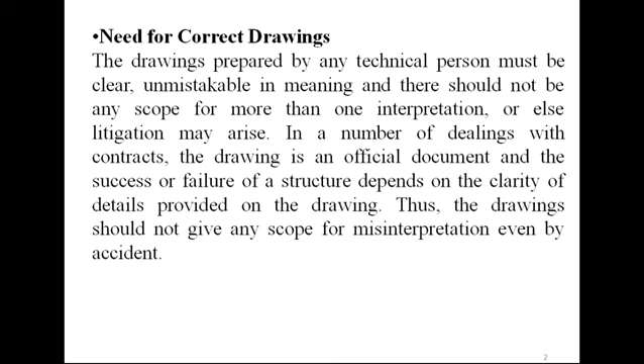If by mistake you add some wrong information into the drawing, the manufacturer can manufacture that component with whatever wrong information you have given. So that's why you should not give any scope for misinterpretation even by accident. It would not have been possible to produce machines and automobiles on a mass scale, where a number of assemblies and sub-assemblies are involved, without clear, correct and accurate drawings.

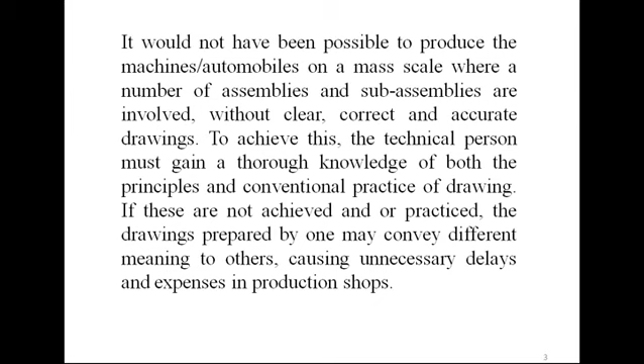To achieve this, the technical person must gain thorough knowledge of both the principles and conventional practice of drawing. If these are not achieved or practiced, the drawings prepared by one may convey different meanings to others, causing unnecessary delays and expenses in production shops. Hence, an engineer should possess good knowledge not only in preparing a correct drawing but also in reading the drawing correctly. So for reading purposes also we need to understand GD&T properly.

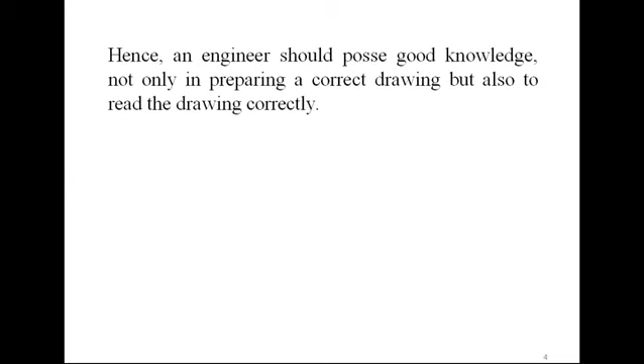We need to understand the standard practices, whether we are going to follow first angle projection or third angle projection, or whether we are using the inch system or metric system, because whatever you want to convey must get proper information to others. Now we are going to see the classification of drawing. Machine drawing pertains to machine parts or components. It is presented through a number of orthographic views, so that the size and shape of the component is fully understood. Part drawings and assembly drawings belong to this classification.

There are two types of machine drawing. Machine drawing is very important; when we provide a drawing to the manufacturer, it must be a proper drawing. One is a part drawing and the second one is an assembly drawing. A part drawing is a detailed drawing of that part. When you add every part, your assembly is formed. So when we are manufacturing the assembly, we are manufacturing every part as a unit, so a detailed description of every part is important. When every part is manufactured properly, we assemble them into one unit.

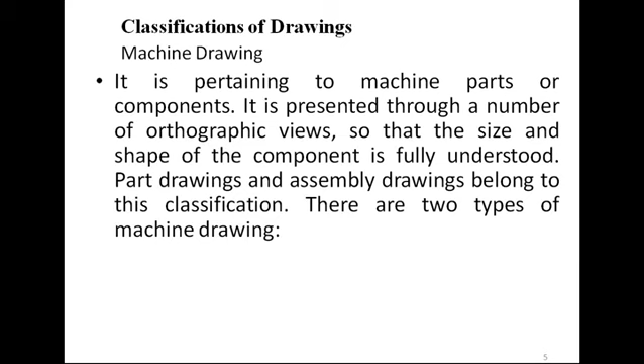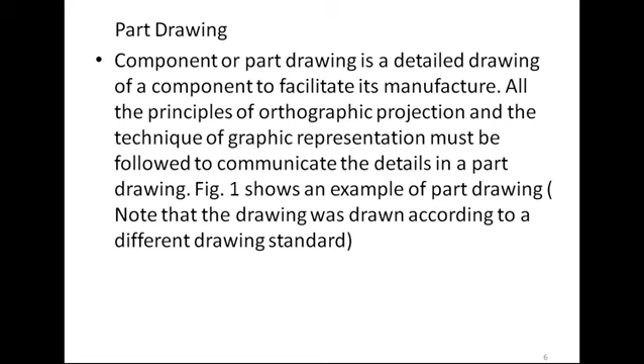So first is a part drawing. A component or part drawing is a detailed drawing of a component to facilitate its manufacture. All the principles of orthographic projection and the technique of graphic representation must be followed to communicate the details in a part drawing. Figure 1 shows an example of a part drawing. Note that the drawing was drawn according to a different drawing standard. The part drawing must include every detail, because it is a separate part of an assembly. We prepare every component with part detail because we want to manufacture every part, and then assemble those parts.

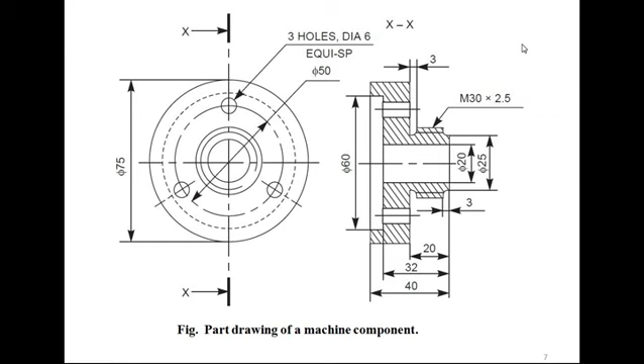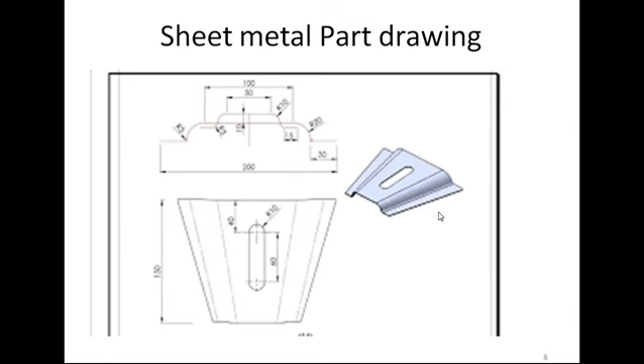Then one more is the sheet metal part drawing. Whatever sheet metal component we want to prepare, a detailed drawing is given here: the height is 150, the width is 200, and the corner radius we want to manufacture is 5, which is also mentioned. So whatever sheet metal parts we want to manufacture, we require to give proper dimensions.

A part drawing is a detailed information drawing of the individual parts, called a piece part drawing or part drawing or detailed drawing. Detailed drawings contain all of the necessary information to manufacture any specific part of a product. This is the same thing we discussed earlier.

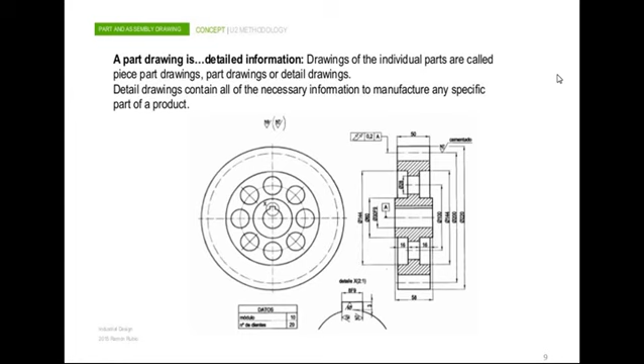Next is the assembly drawing. A drawing that shows the various parts of a machine in their correct working location is called an assembly drawing. Here the figure shows an example of an assembly drawing.

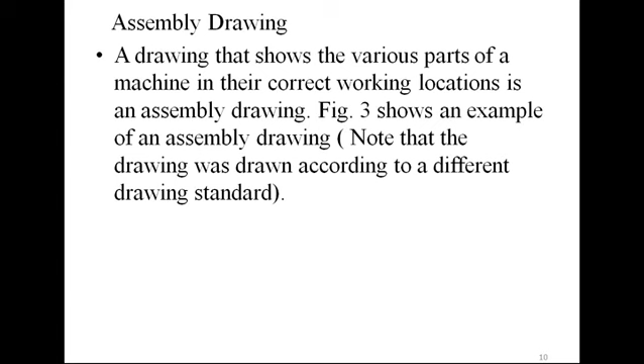Whenever we are preparing an assembly drawing, we require to provide a bill of material. In a bill of material, we require to provide the item numbers, how many components are present, the quantity, meaning how many times we require to use the same component, then the part list, part number, and which parts are required. The material is also very important, along with any remarks we want to mention.

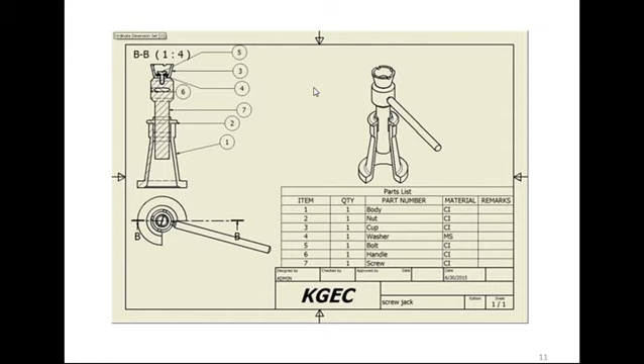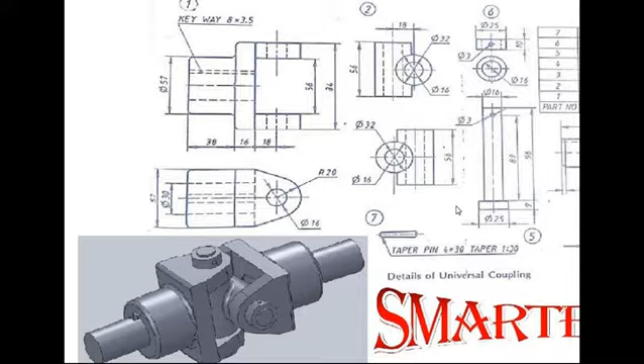This is one more kind of assembly. Here we have shown the detailed parts. This is number 1 component, this is number 2, this is number 3, this is number 4. All these components, whatever we have manufactured here, we are going to assemble. Here we have shown how we are going to assemble this one, and this is the final assembly.

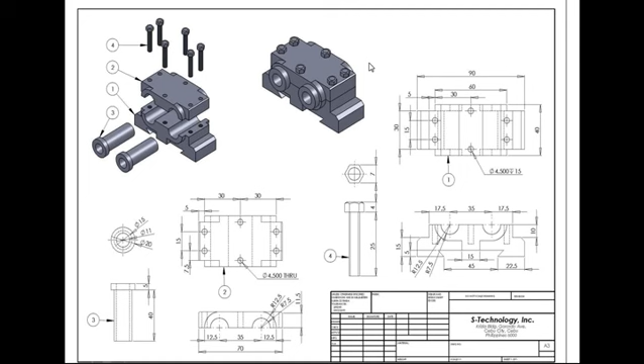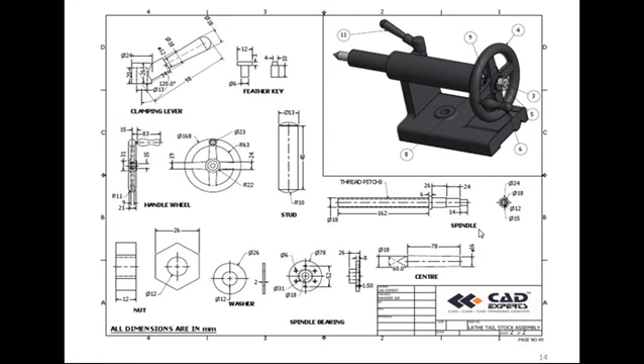So this is a tailstock. Here we have shown how many components are present. This is the assembly of this tailstock, and every detailed component we have shown: this is clamping lever, this is feather key, this is nut, this is washer, this is hand wheel, this is stud, this is spindle, this is spindle bearing, this is center.

So here you will see all the numbers. Number 1 is body, so this is the body part. Then second one is the barrel, quantity 1. So see here, this is a barrel.

Then third number is a cap, so you will get here, this is a cap. Fourth one is a spindle, we are using here spindle. Fifth one is a hand wheel, now you will get this is a hand wheel.

Sixth one is a center, so here we will get this is a center. Then seventh one is a key, so this is a key here we have assembled. Eighth one is a lock nut, then this is the lock nut. And 9th one is a hexagon head screw, shown here.

So like this, the number of components whatever we have seen here, all the components are assembled and we have made the tailstock body. This is the most important thing. While we are manufacturing the components, detailed drawing and part drawings are important. When we have ready-made detailed drawing, we can prepare the actual component on machine. Once we have completed all the machine components, we require to make assembly, and for preparing this assembly, we can use the assembly drawing.